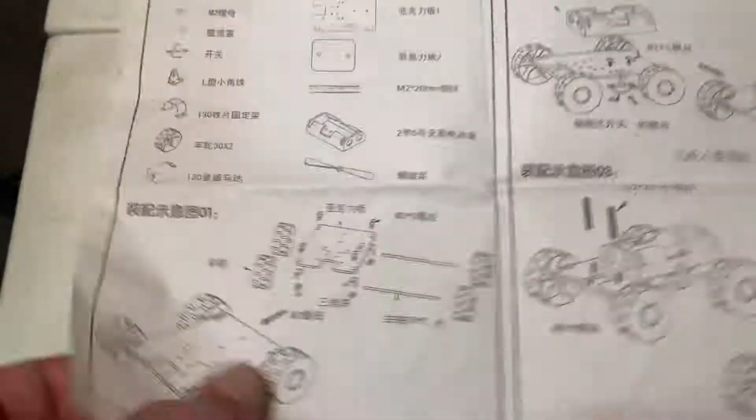These were actually in Chinese, so I just looked at the photos to get an idea of what I was building. For our propeller motor car, we have a motor, tires, axles, brackets, nuts and bolts to hook everything to the chassis, battery pack, the propeller, and a holder for the motor, as well as a switch.

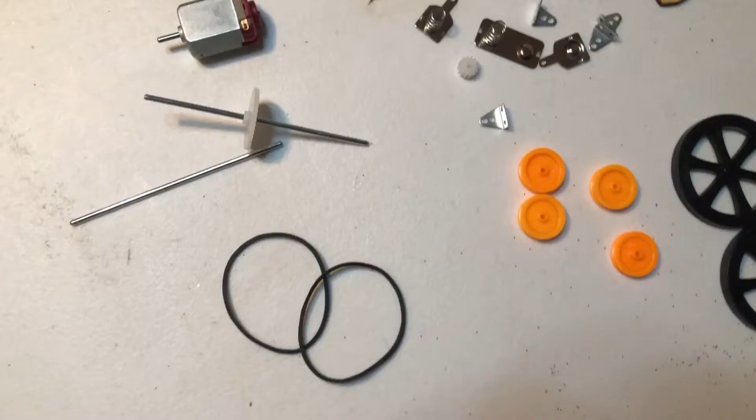Next, for our belt-powered motorized car, we have 2 rubber bands, some pulleys, some tires, some lead wires, a battery pack, the chassis, the corner brackets for the axles. The axles, we have the motor, as well as a set of gears. They provided a small screwdriver to screw in your nuts and bolts.

First thing I'm going to do is mount the gear power axle to the chassis. This is the axle that has the gear that gears up to the motor that actually moves the pulleys around that spin the belts around and make it all-wheel drive.

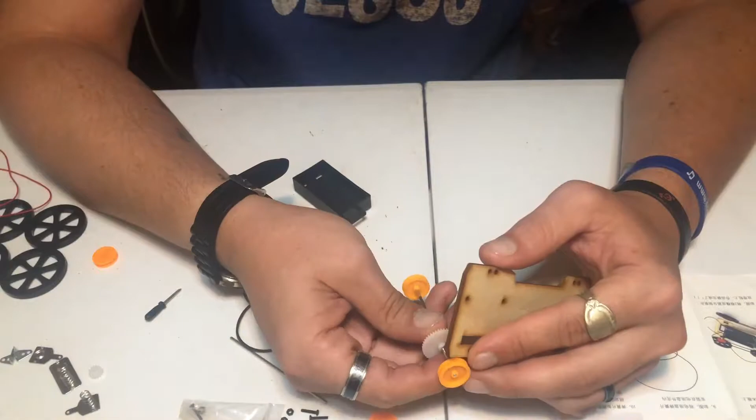So what I'm doing here is I'm just putting these 2 orange pulleys on here before I install the wheels, and then lining them up with the chassis before I mount them with the corner brackets. I fasten the axles to the chassis with the brackets using the nuts and bolts provided with the precision screwdriver.

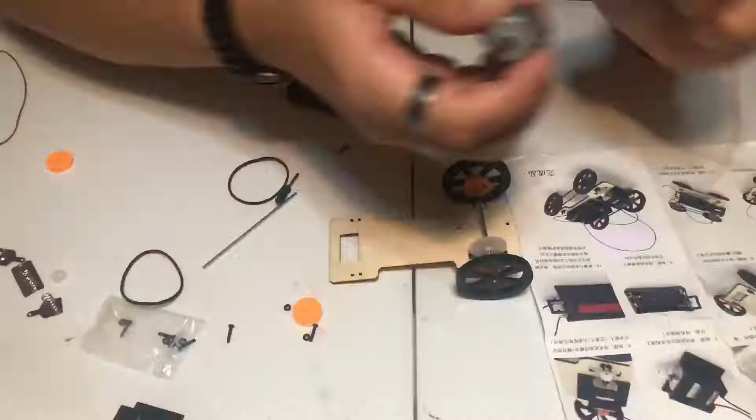Next, I installed the wheels to that axle. Next, I installed the 2 lead wires on the motor on positive and negative. Now the diagram showed them just twisting the wires on here, but you could solder these if you'd like.

Next, I'm going to mount the motor to the chassis. We're going to place it in its little black housing and put our other gear on the motor and line that up with our gear that's on the axle. And then we're going to just drop 4 nuts in there and tighten it up with a little precision screwdriver.

Next, I'm going to install my 2 brackets for my front axle. Once you have those brackets installed, then you can mount your axle, pulleys, and tires.

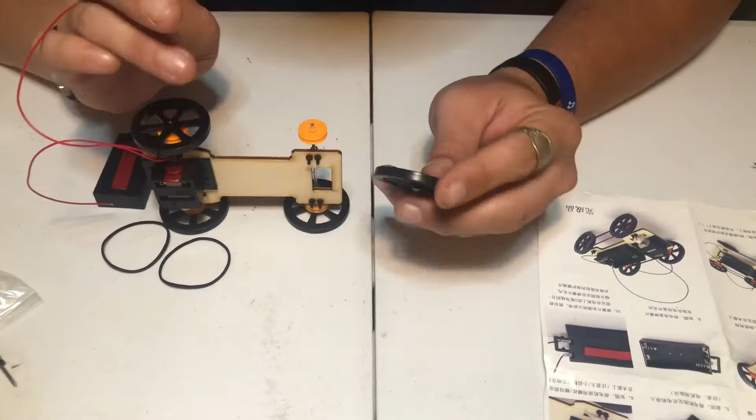Next, we're going to mount and wire our battery pack. We're going to mount it with a nut and bolt in the center, and then we're going to take the 2 leads from the motor and just twist them to the positive and negative on the battery. You could solder these wires, but the diagram just shows them twisted.

Next, I'm going to take my 2 rubber band belts and match them up with the pulleys, lining up the back axle pulley with the front axle pulley on the left and right.

Now let's start on the propeller motor driven car by adding the brackets for the axles, mounting these with the nuts and bolts and precision screwdriver provided. Then I'm going to add the tires to the axle and mount them to the brackets that's on the chassis.

Next, we'll mount the battery pack. Next, we're going to install these 2 engine mounts to our chassis by using our precision screwdriver and screwing 2 screws up through the bottom, through the chassis, into the bottom of the 2 brass pillars.

Now we're going to install the engine to the chassis. There's a bracket that goes around the engine and nut and bolts to a plastic platform. Then that platform bolts down to the 2 brass pillars that we installed previously.

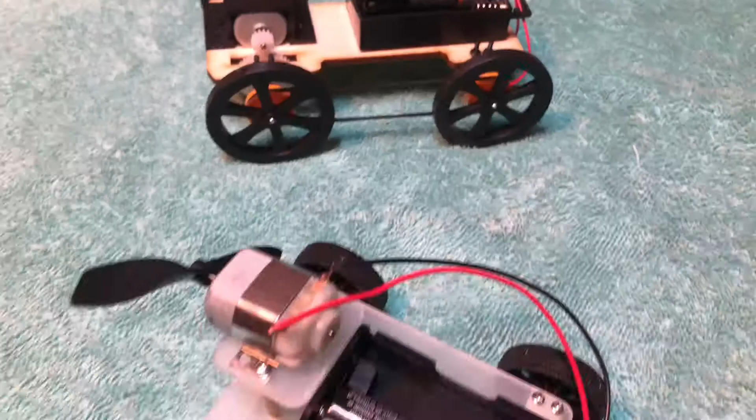Now let's play it and rate it.

All right, everybody, now that I have the cars finished, I got Camille Ray back, and we're gonna race them. She's got the car with the propeller, and I'm using the ones with the pulley system. The winner. She says it's the winner.

But we got a little start and finish right here in the parking lot, and we're gonna see who makes it to the finish line first. 1, 2, 3.

Overall, I give these kits a 9. I wish the instructions were in English or there was an English link just for more of a beginner person. I think this is a great way to teach you how electric motors work in different ways that they can make propulsion. Thanks for watching the Kit Pit.